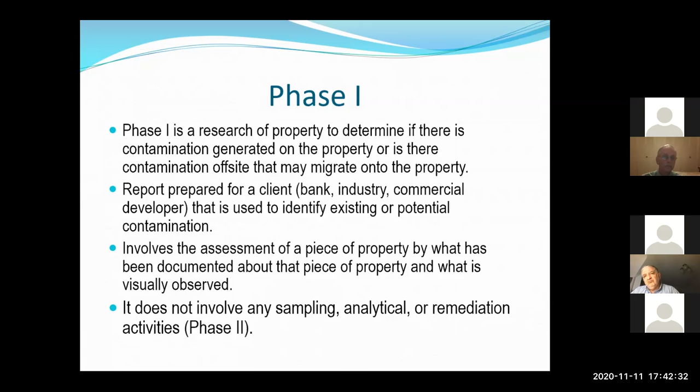This is a brief regulatory history of phase ones. In 2005, the EPA issued standards called 'all appropriate inquiry' for defense against liability under CERCLA. Under CERCLA, if you have contamination on your property, you could be responsible for cleaning it up. As part of the defense, you can say you did this investigation and determined there was already contamination when you bought the property, or that potential contamination could come onto your property from off-site, so you shouldn't be responsible. In 2006, prospective purchasers had to follow federal standards under 40 CFR Part 312 when conducting this type of due diligence. Performing a phase one incorporates the data into an innocent landowner defense, and it's considered the first step in due diligence for site characterization and deciding whether to proceed to a phase two.

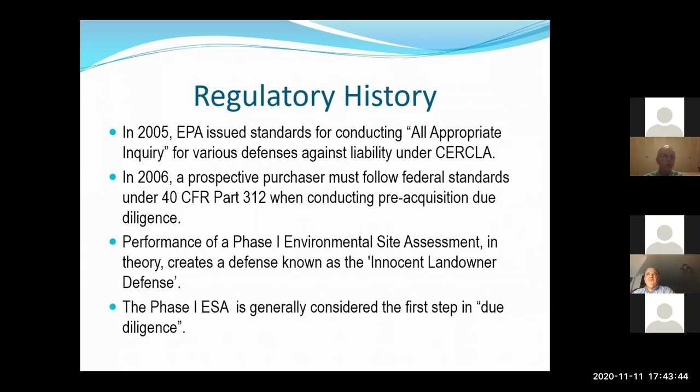So what are the main elements of a phase one? There's a records review to identify what they call a recognized environmental condition — this includes both federal and state government databases that get reviewed, plus historical maps, aerial photos, and city directories to see the property's history over time. As part of the phase one, you also do a site reconnaissance where you look for recognized environmental conditions, such as staining, drums on site, paint, solvent waste, thinners, petroleum spills, transformers that may have PCBs, or other problems you might identify on the property — even dead grass that might indicate something was spilled there.

Also as part of the phase one, you'll do interviews, looking at current and past owners or operators to learn about the site history — you may be visiting a closed site and not know what was there 20 years ago, so it's very important to interview people with knowledge of the property. At the end, you determine if recognized environmental conditions are present and what your recommendation will be for the property.

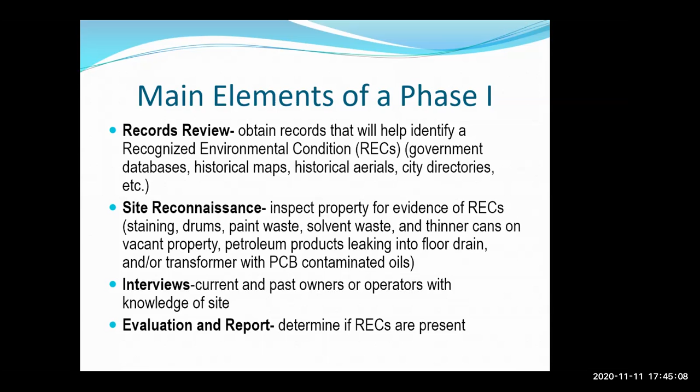There are a number of companies that supply the databases you use for a phase one review — EDR is one of them, and there are several others. I wanted to show some of the things they supply. One is Sanborn Maps, which are insurance maps created between 1867 and 1970, mostly for larger metropolitan areas across the country. They're great for seeing how properties changed and looking around the property to see what's changed over time — they'll give you a series of these insurance maps.

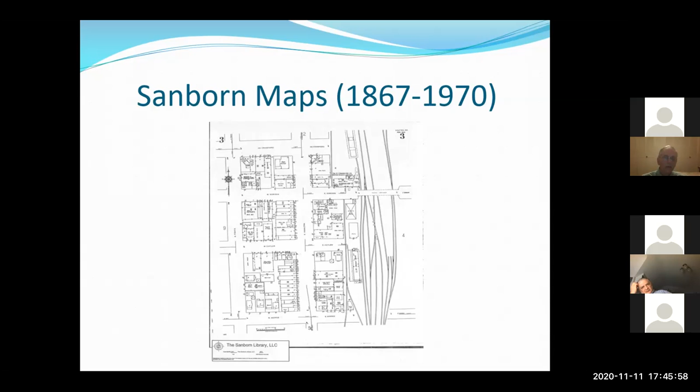Another area they'll supply is topographic maps. Here, the map on the left is a topo map from 1894, and the one on the right is from 1974, so you can see how the cities changed over time. You might also see other information like pipelines on these topo maps to help identify how the area has changed.

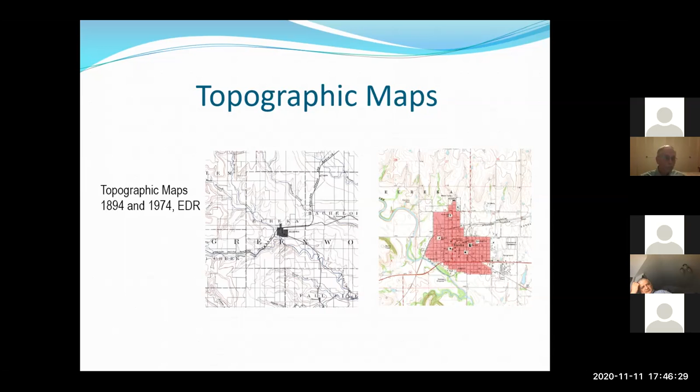This is kind of the meat of the whole report, the one reported by the EDR. The top part is all the databases that are under federal control. The bottom part is state and tribal databases that they get information from.

The second column is the minimum distance, a radius around your site that they look within to see if there are any sites on these lists. On the far right is how many sites they found. In this case, you have one site that's on the federal CERCLIS list.

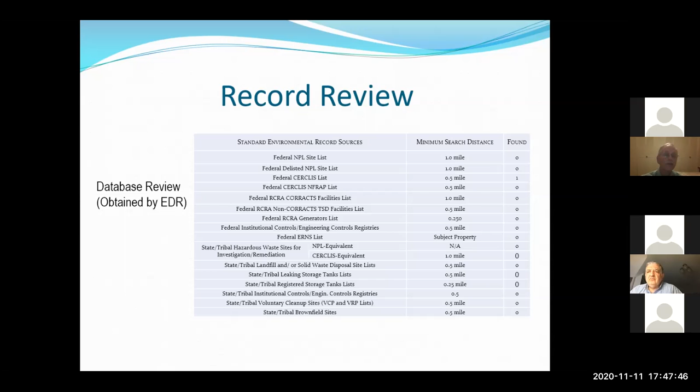So now you've done your interviews, you've reviewed all the data, you've done interviews and site visit. Now you incorporate all that information.

But as a geologist, you need to look at other information. What are the subsurface conditions of the area? Do you have sinkholes? What kind of geology? What type of soil types do you expect to see? Even though you don't drill out there under Phase One, what type of soils do you expect to have? What depth is the bedrock, or is there bedrock in the area?

What kind of groundwater do you have? How deep is the groundwater, and which direction does groundwater flow? Are you upgradient or downgradient of a potential contamination source? What's the topography of the area, where does surface water runoff go? Could it come onto your property because you're sloping down from a high area?

A lot of this information you can get from state geological surveys. They have great references for a lot of these areas that will help you. These are other materials that you'll need to include in your Phase One.

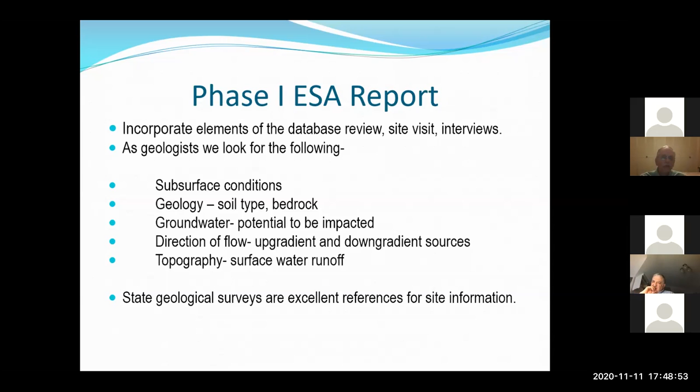So if you say yes, we have some recognized environmental conditions, we recommend doing a Phase Two, where you actually go out and drill and collect soil and groundwater samples.

Depending on the size of the property, it's typically a one-day site investigation. Usually they use a direct push rig and will collect three soil and three groundwater samples. Wells are only temporary and will usually be abandoned after you've taken your samples.

There's no groundwater elevations collected, so you can't produce a potentiometric surface map for your client to show which way groundwater is flowing.

You can kind of guess where the water table is. You can also screen for contamination, and obviously describe the lithology that you're going to be drilling through.

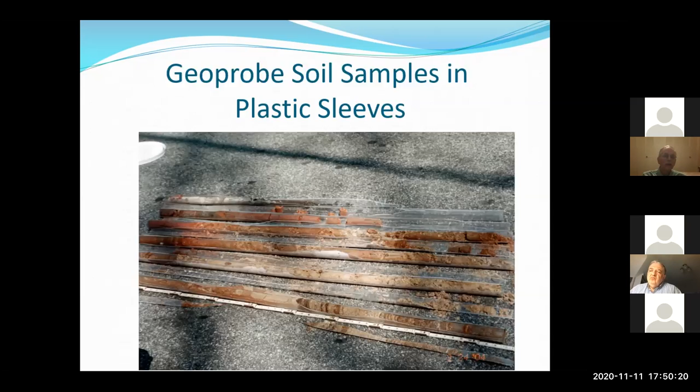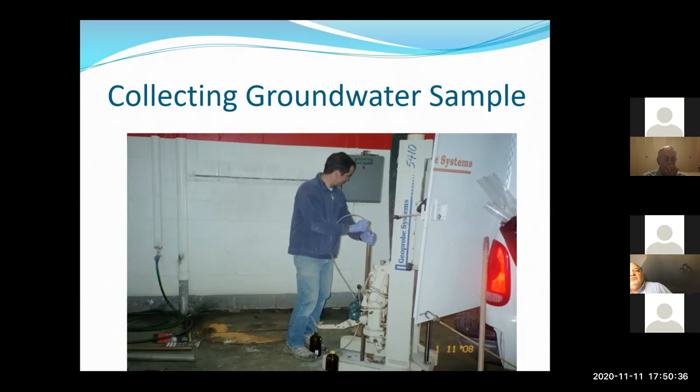So let's turn to landfill compliance. This is another area where, obviously, the major problem is the creation of methane in the subsurface of a landfill. There can also be groundwater contamination, but usually the major issue is methane.

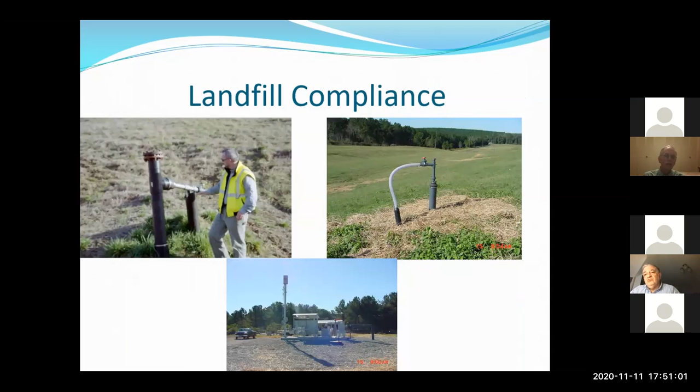Typically what happened over the years is, as shown in the bottom pictures, they collect the methane and flare it off.

Since then, it's been closed, and they've actually put solar panels on top of that landfill.

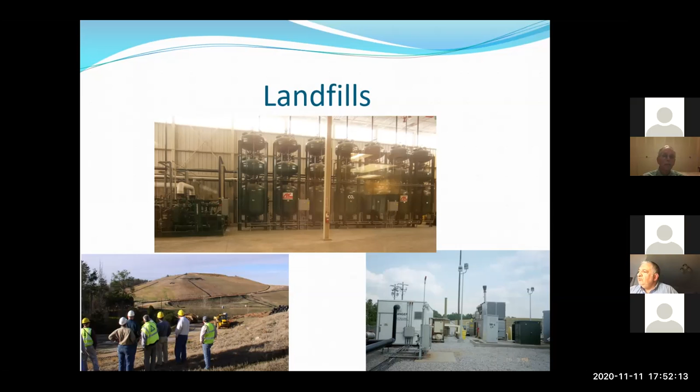As a new hire for a consulting firm, probably for the first couple of years, you're going to be out in the field an awful lot. And when I talk to students, they say, great, they'd love to be outdoors and not in an office.

You're looking for contamination, so they'll teach you how to use this instrument. You'll develop and purge monitoring wells. You'll learn how to groundwater gauge, which is used for creating potentiometric surface maps of the site. And then you'll learn how to sample the groundwater.

UST removal, as I said earlier, is still a big part of the industry. And when you do a tank closure, you take soil and groundwater samples.

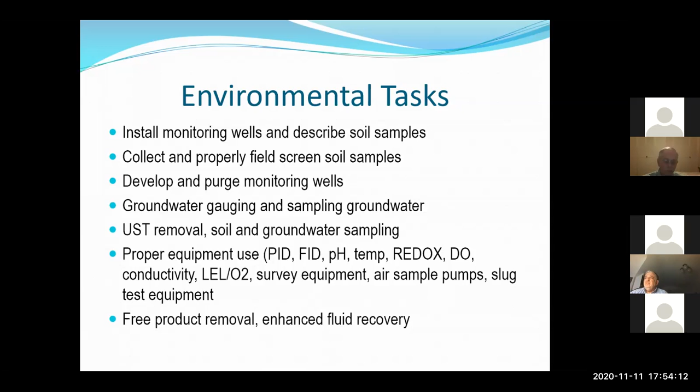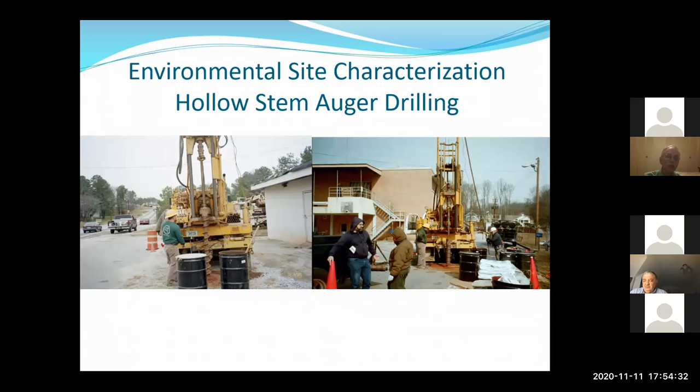You continuous drill, and then when you want to take a soil sample, what they have is a split spoon sampler, usually 18 to 24 inches, maybe a little longer, where there's a hammer on the rig that hammers down to the subsurface. It has a stainless steel tube that you can open up to describe and collect soil samples for the laboratory. Typically, you can do these continuous, but more often they take a sample every 5 feet for you to look at and describe.

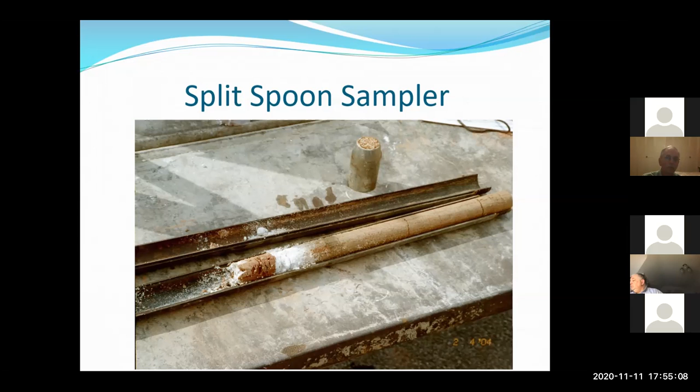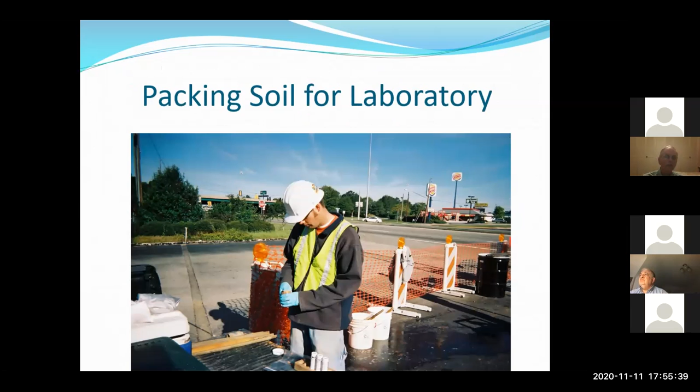After the well has been drilled to the total depth, usually below the water table, they'll install a monitoring PVC well screen. The lower part of the screen is slotted so water can migrate into the well. Above that, a little bit above the water table, they'll put a riser, which is a solid piece of PVC without any screen, so water can't migrate into it. As you notice in this picture, both drillers are wearing gloves, so there's no contamination on the PVC pipe.

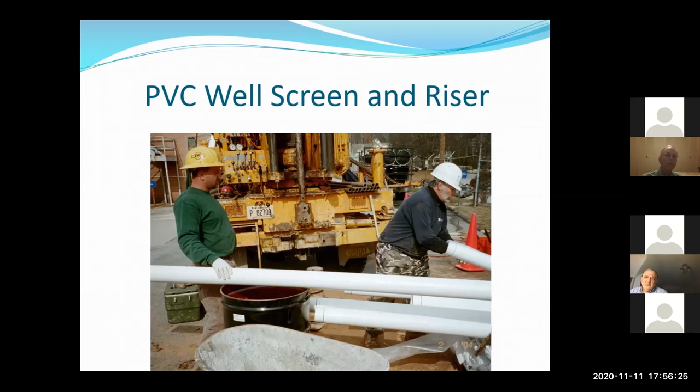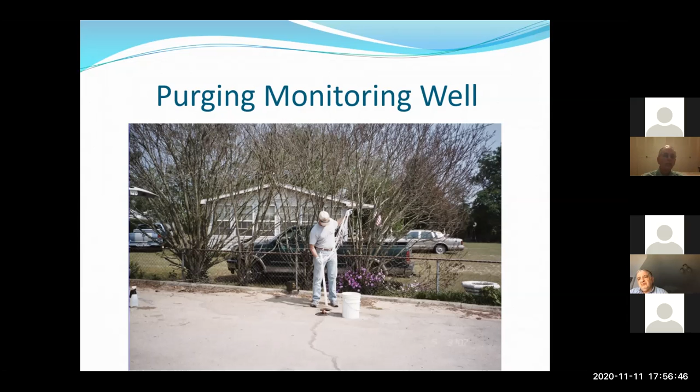And here's a picture of a UST being removed. There are still USTs across the country that still need to be removed. So a lot of companies do a lot of work either removing and later putting newer tanks into the ground.

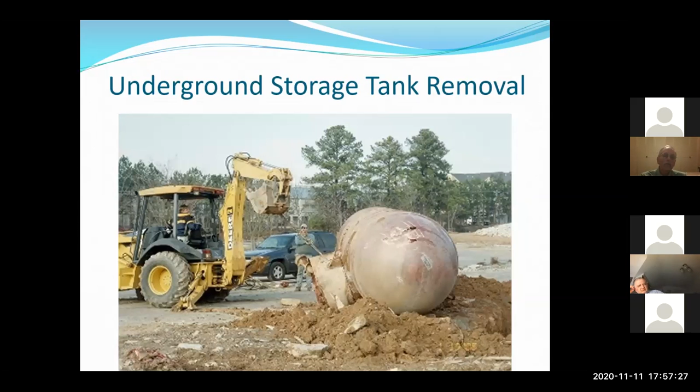This is a picture of different types of remediation systems that I've seen over the years. Typically the top left-hand drawing is more what we see today. The reason is if it's in an active commercial area or if there are homes nearby, it's actually all enclosed. It has insulation to keep the noise down, and because it's enclosed, equipment is out of the weather, and there's also less chance of being vandalized.

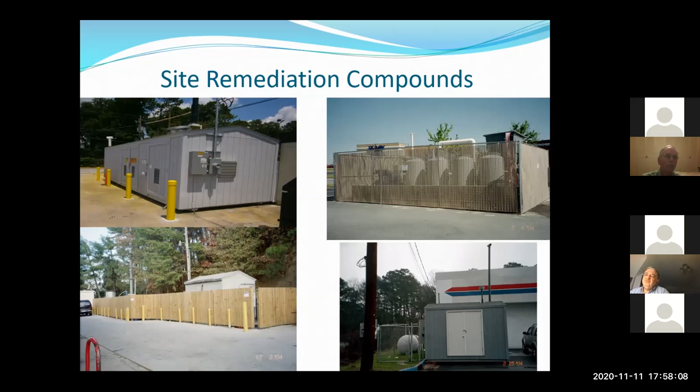When it comes to cleaning up the groundwater, there are obviously lots of different methods that can be used. You can use mechanical methods. The top two pictures show where you actually pump the water through the system and separate the contamination from the water, then burn the volatiles. The top right is where they're air sparging or using vapor extraction to extract volatiles from the subsurface.

There are still a lot of areas where you actually go out and if there's soil contamination, you dig it up and dispose of it. The lower middle picture shows them injecting different types of chemicals to destroy the contamination. In the lower right picture, they're using chemicals that go into the bottom of this pit down to the groundwater and mix with the groundwater to hopefully destroy the contamination.

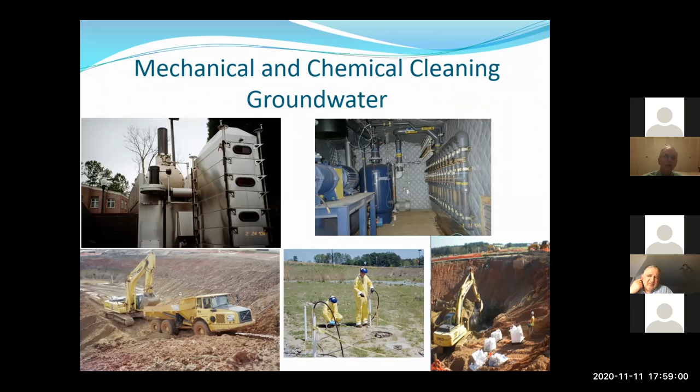What they have are hydraulic push rods inside the vehicle where they run specialty equipment down the hole that will identify the type of lithology going through - are they in sand, silt, or clay generally? There are also laser sensors that can identify whether they're going through areas typically of gasoline or diesel.

This next picture is inside the vehicle, where the left picture shows the hydraulics pushing down the tubes. The monitor on the right, it's hard to see, but you can see a little blue, yellow, and red, which will identify whether they're looking at gasoline contamination or diesel.

This is really important information because you may have some contamination above the water table, some at the water table, and even below the water table. So this gives you an idea of where the contamination is, where you need to direct your remediation.

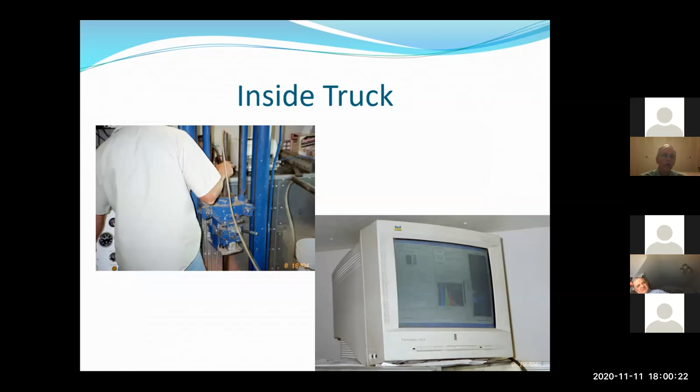Other services are vacuum units. I know of two different geologists in the Atlanta area that own vacuum units, and these can be used if there's free product of gasoline or diesel in the subsurface - you can have these units come out. They're very small and help remediate the site.

Also, if you're doing pilot tests and designing the remediation and seeing what kind of remediation system you can use, a lot of times they'll use a vacuum truck to do this pilot test. So they're a very important piece of equipment that consultants are not going to have.

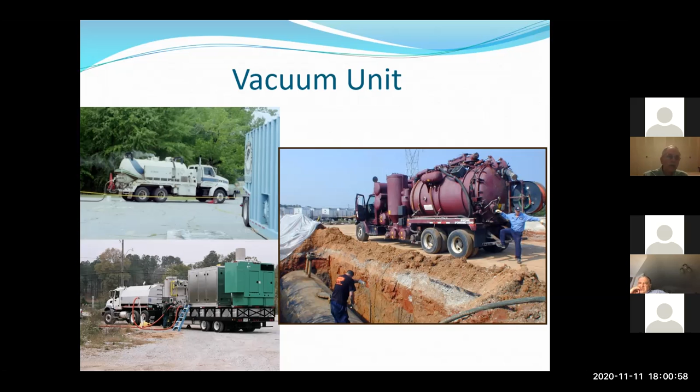Air sampling has really become important, probably over the last 10 years, because they're worried about vapors getting inside buildings. I know of a friend, a geologist, who specializes in collecting air samples to determine if there are issues.

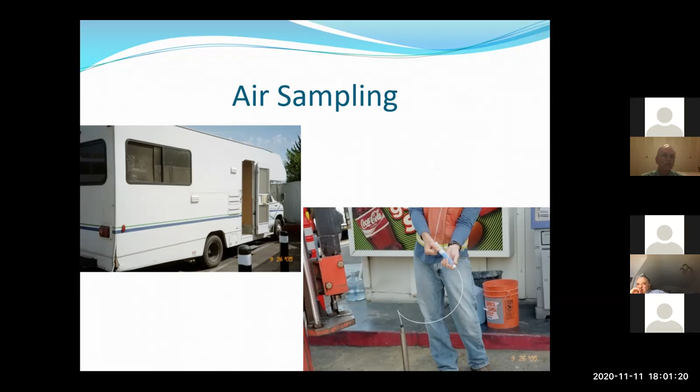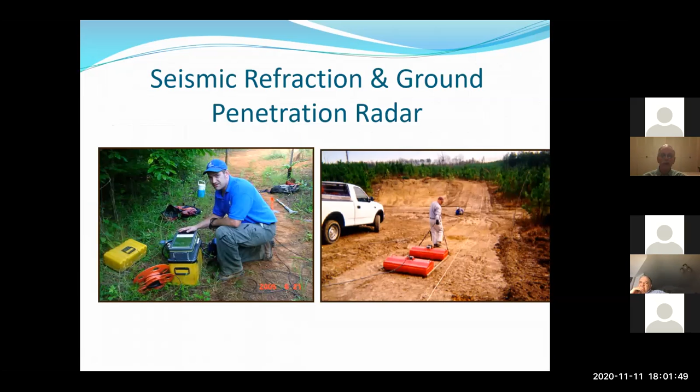And then water resources obviously is still going to be big for many years, where both municipal and industry need additional water resources. So this is another area of help.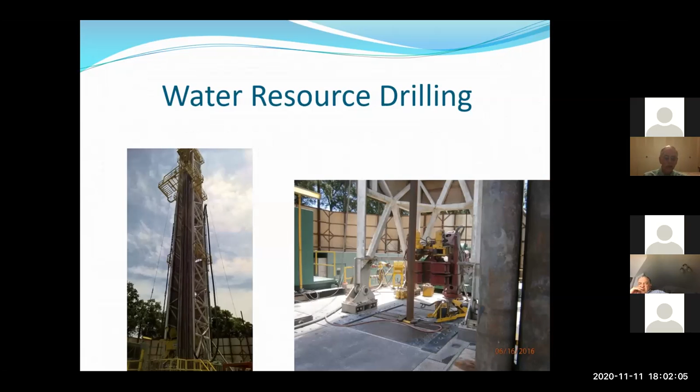In New York, most of their water comes from upstate New York, goes through a number of aquifers or through a water system. Then when it hits the city, it's in a series of tunnels all throughout the city.

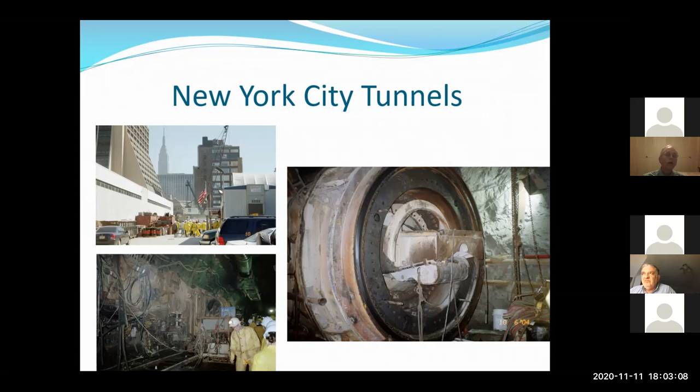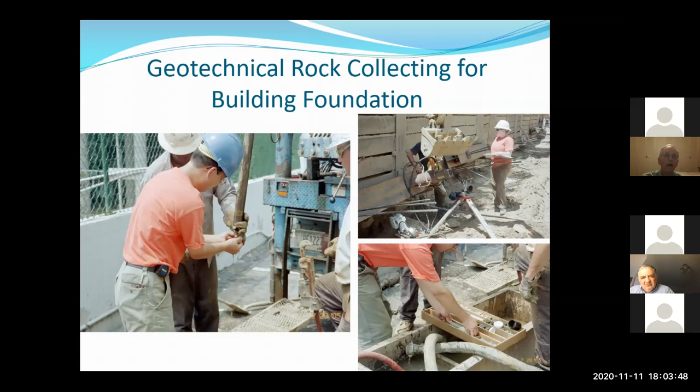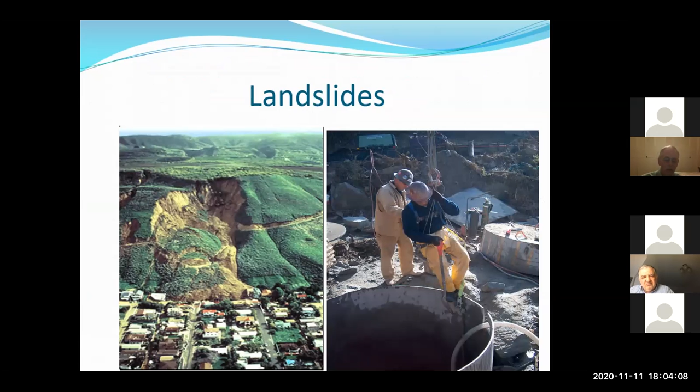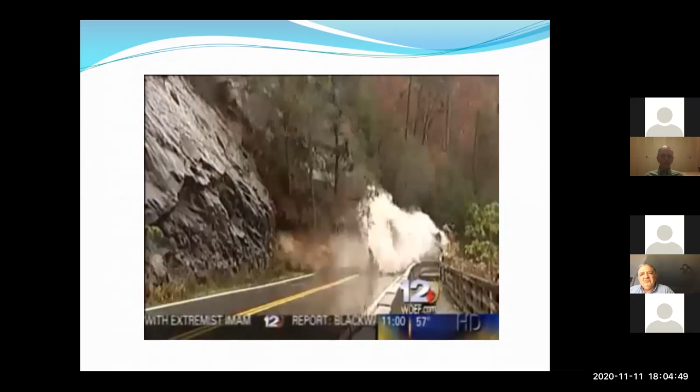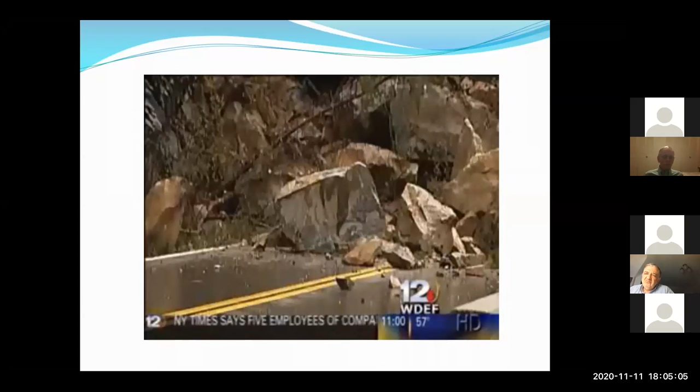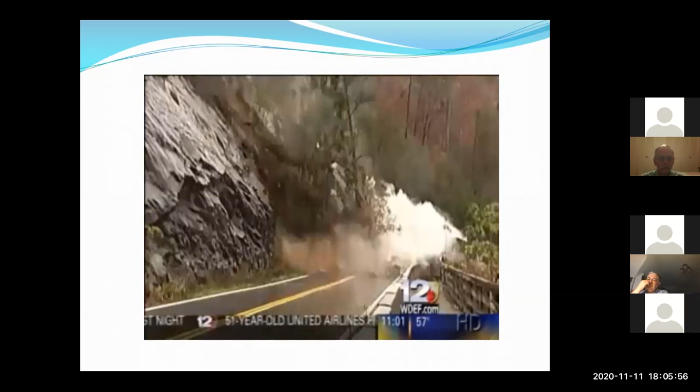That massive rock slide in Polk County has caught the attention of the entire country. Seeing the spectacular act of nature has many wondering just why it all came tumbling down. The very first thing that jumped out was the sound, the popping sound, like a car door being slammed. A clear sign of trouble to TDOT geologist Vanessa Bateman. We couldn't see the rock moving, but you could hear it, and that's the kind of sound when it makes that, it's starting to let loose up on the slope. Sure enough, minutes later, a wall of rocks, trees, mud, and other debris tumbled to the ground, blocking Highway 64 in the Ocoee Gorge. But what caused this awesome show of Mother Nature's power? We went to Dr. Jonathan Mies in UTC's geology department for answers. He says the rocks in the Ocoee have weak spots called cleavage planes. Typically, water gets into those things and they are likely to slide. And so, looking at that video, it appears that large slabs of rock slid off of smooth surfaces like that, and I would suggest that this is really a recent past slide. Dr. Mies discounts the mild earthquakes we see in this area as a trigger for this slide. Certainly, anytime the ground is agitated, you couldn't ignore it, but I don't see it as a real influence here. Instead, he points to recent wet weather as the culprit. I'd associate this slide probably as much with the rain as anything else, and that's quite common for these sorts of rock slides to occur at times of rain. An act of nature that put on quite a show. All of a sudden you hear the rumble and the whole thing. And Dr. Mies points out earthquakes are fairly common around here. We're in the East Tennessee seismic zone, that's one of the most energetic areas in eastern North America. They tend to be small, though, with no damage.

So I hope you enjoyed that. Anyway, geotechnical engineering obviously uses geologic knowledge to solve engineering problems. A lot of these projects are big public works that can include the location and design of a reservoir, power plants, transmission lines, tunnels, highways, wind turbines, pipelines, water treatment plants, airports, and harbors. But they also address geologic hazards such as slope stability, geotechnical problems, erosion, dewatering, and flooding.

Because I work for the Georgia Environmental Protection, I wanted to at least expose you to potential jobs with the state. In Georgia, it's called the Georgia Environmental Protection. In Oklahoma, it's called the Oklahoma Department of Environmental Quality. There is also the Oklahoma Corporation Commission, which regulates underground storage tanks in Oklahoma.

So why do I think it's important that you at least consider working for a state? I'll also talk a bit about federal jobs. Essentially, as I said earlier, a lot of the environmental laws came into existence in the 1970s and 80s, so the first generation of geologists hired back then are now all retiring. In fact, most of them are retired now.

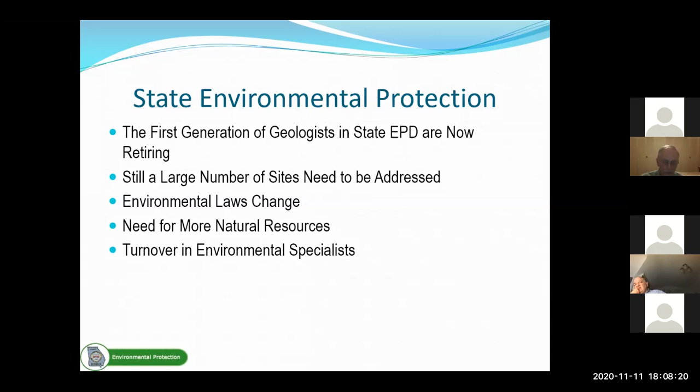So what programs are there within the state program that hire geologists? Well, obviously there's solid waste management having to do with landfills, to make sure they stay in compliance. Surface mining usually is a very small group of geologists. Underground storage tanks, at least in Georgia, is one of the larger groups. There are hazardous sites, both state and federal, that the state takes care of. Brownfields is a unique group - the developer comes to it typically wanting to redevelop a blighted site and will come to the brownfields area. This group will work with the developer to expedite cleanup of the site, and there's also tax credits that the developer gets. So this is very important - it's a very big plus program that people like, to get blighted properties off and get them to be useful property again.

Wellhead protection is for drinking water wells, to make sure there are certain radiuses around these wells where certain industries cannot be built, so it protects the well from being contaminated. Also, you have injection permits - the picture I showed you earlier with the injection of chemicals in the subsurface actually has to get a permit before they can do that from this group. And also there are water withdrawal permits, both municipal and industrial, that have geologists.

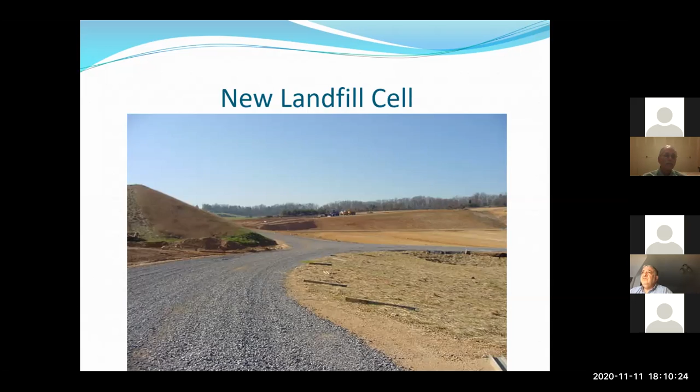Typically in state government, in environmental protection, most of the time you're in the office. Now, obviously right now with the virus, everybody's working from home, so they don't go out in the field much right now because of the workload. But they do encourage you to go out in the field to see all the different aspects of the drilling, remediation, and investigations that are done throughout the project of the site you may be in charge of. So here are 3 different pictures showing different types of geoprobes.

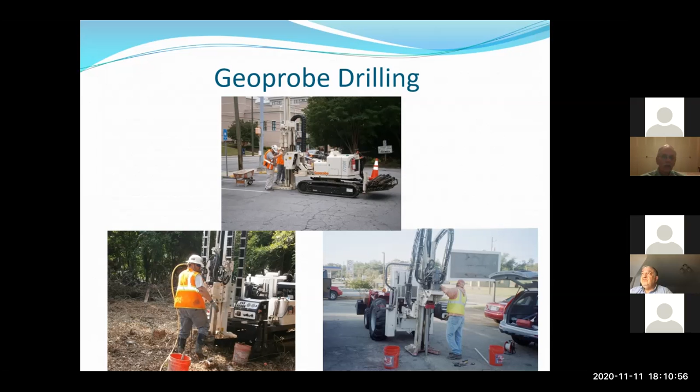This is the site I showed you earlier, Lisa, where we're taking geotechnical samples. This is a Greyhound site in downtown Atlanta that had a major diesel release over a long period of time - it wasn't from the tanks, but from the piping. It migrated below the facility and also migrated across the street below a parking garage. So while we were actually remediating the soils and groundwater contamination, they were starting to build the building on the right. That's one of the things that was very gratifying about working for the EPD, where I could see properties that were blighted not being used anymore now being used. Here we got a nice high rise in downtown Atlanta.

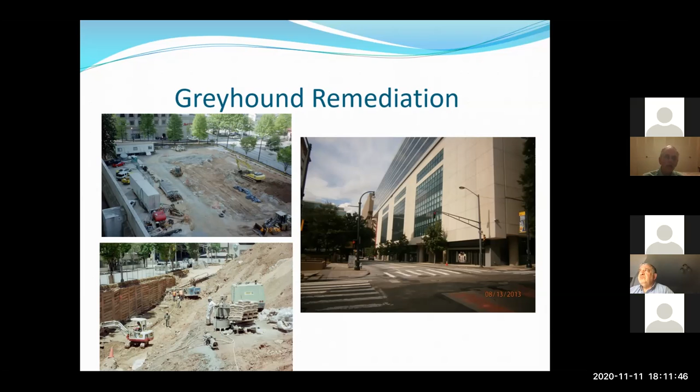I would like to address UST inspectors. In Georgia, at least, all programs have inspectors that go out into the field to inspect whatever program they're under, and typically we consider these entry-level jobs. They'll teach you, whatever the program - these are all obviously UST underground storage tank inspectors - what to look for, teach you the paperwork, what the person that has the tank, what kind of paperwork he or she should supply you.

And this is a really good entry-level position. A lot of the people, after a few years, they may go into another type of inspection program, or some of them actually become geologists. A lot of the geologists in the underground storage tank program start out as inspectors. The other thing is, if you decide to leave the state and work for private consulting firms, you are considered to be very knowledgeable of what you do.

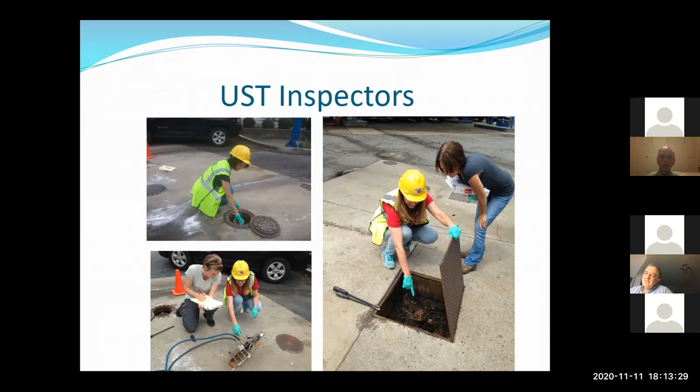And you're a big asset to a company because of your knowledge of whatever program you're in. And this is a picture of some of our geologists. The one on the left in the middle is one of our geologists. This is a sonic rig that drilled these samples. And this is actually at the Ford plant, and they're just looking at describing the soil samples.

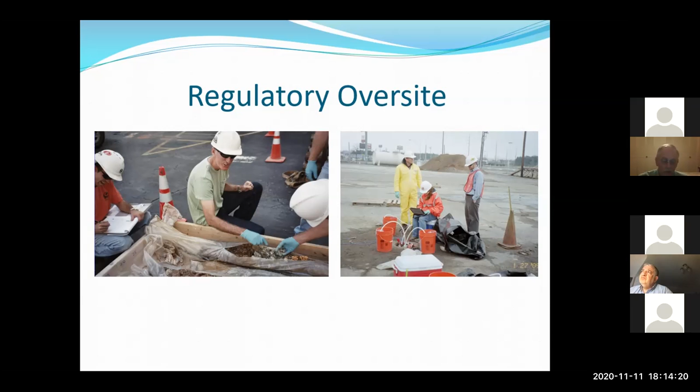The one on the right is also at the Ford plant, where the geologist standing to the right works for the EPD. And we're not out there to harass or anything like that. We're doing a pilot test, injecting chemicals at different subsurface depths to see how it migrates and how it cleans up the subsurface of the groundwater. So obviously we like to get out there just to learn different things, especially when they have new technologies. We really like to get out there so we can learn these technologies ourselves.

Besides the programs I went over, there are other smaller programs within the environmental organization of the state. A lot of times coastal management will deal with permitting coastal issues, asbestos, lead-based paint, radon, radiation, pesticides, scrap tire. Some states regulate heating oil tanks, and a lot of states regulate above ground storage tanks. So these are all additional programs that will have geologists, maybe not in large numbers compared to the other programs that I showed you.

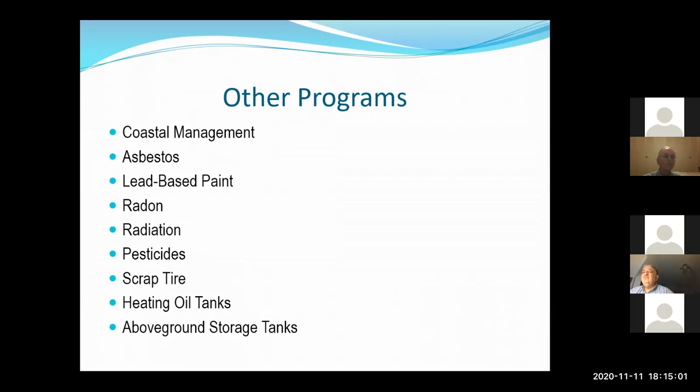Some state programs actually have natural resources under their control, such as oil and gas permitting, that would obviously have geologists. You have orphan wells, and these are oil or gas wells that maybe the company went bankrupt on and they haven't been abandoned properly. They're not producing wells and they have to be abandoned. All these natural resources programs have inspectors that go out and inspect the facility. You have mine permits, and then you have to do the reclamation of mines. You have coal bed methane, and all these coal resources that have to be permitted and regulated.

Besides state, there are also federal agencies. Obviously you have state research agencies - these are the state geologic surveys. Generally speaking, most state surveys would like to have either a master's or PhD, not so much bachelor's. Then you have federal research agencies, including the U.S. Geological Survey, NOAA, and NASA. And then you have state and federal DOT. You have federal FEMA, Federal Emergency Management Agency. And I actually have a friend that left consulting and works for FEMA now.

And then you have the US EPA, and I've had quite a few geologists that work for the state of Georgia that have gone on to the EPA. Then the Department of Interior has the Bureau of Land Management, Office of Surface Mining, Bureau of Reclamation, National Park Services. And then also the military branches hire civilians - not military, civilians working for the government at the military facility, managing their environmental releases that they have, or investigations, and in charge of all their permits.

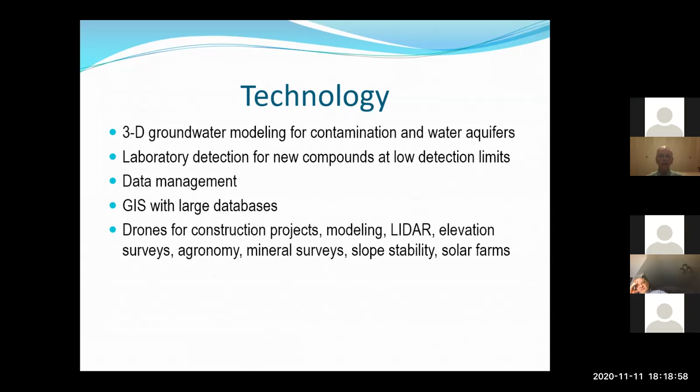About a month ago, a friend of mine who works for a consulting firm did a webinar about their company and what they do with drones. They use them for construction project modeling. They can run LiDAR on the drone where you can remove the trees and look at the landscape. You can do elevation surveys and look at agronomy to see where crops are having problems, whether it's nutrients or water. You have mineral surveys, slope stability, and even solar farms, where they can go over a solar farm and identify solar panels that are not working properly.

I'd like to talk for a minute about licensing. Currently there are 32 states in the US that issue a professional geologist license. Oklahoma is not one of those states that has licensing, but I want to tell you why I think it's important. ASBOG is the organization that actually puts on the test.

It's a two-part test. You have the fundamentals of geology exam, which you typically take right after graduation with a BS. Then you have to work 5 years under the direction of a licensed geologist or engineer, though other states may have different time requirements. Then you take the second part, the practice of geology exam. Once you pass both parts, you can become a licensed professional geologist.

If you work for a consulting firm, you're considered to be offering geologic services to the public, and that's why the state regulates it. It's also very important for your career. When I got my PG license, the company I was working for gave me a $1,000 bonus, so that was nice. Companies need licensed PGs or PEs because certain documents have to be signed and sealed by a PG.

Because of this, when I worked for the state of Georgia and a report came in that had to be signed, when I wrote a letter to the owner, I would send a letter to him and copy whoever the PE or PG is, so they know I'm holding them responsible for whatever I'm asking for in my letter.